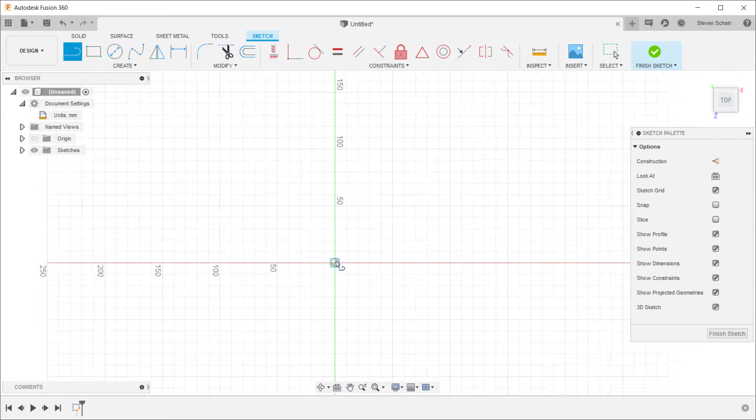You know, I'm always losing my keys or misplacing them. So I decided I was going to design a key holder that I can 3D print and put on my wall. I decided I would use Fusion, and here I'm going to go through the steps of creating this design of a very simple key holder that's flexible and allows me to replace the pieces that I have in the keys. So here I'm creating the base sketch. Once I have the base sketch created, I will add dimensions.

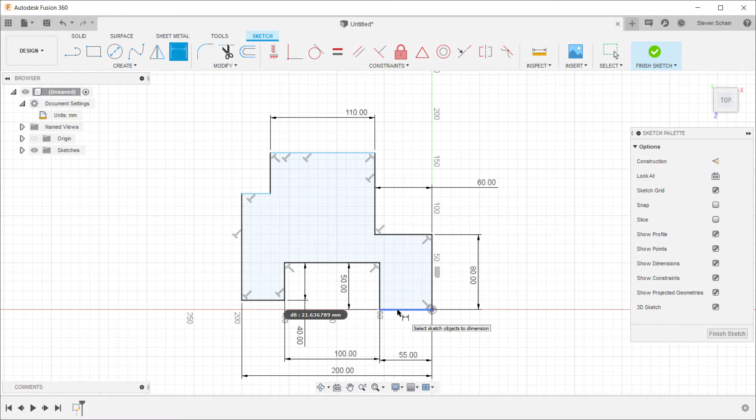Use an overall dimension here, and then I have one more dimension. And now we have our base sketch. We'll extrude that out. It's going to be 30 millimeters. A couple of fillets. Give it a little bit of a nicer look so it's not square and boxy.

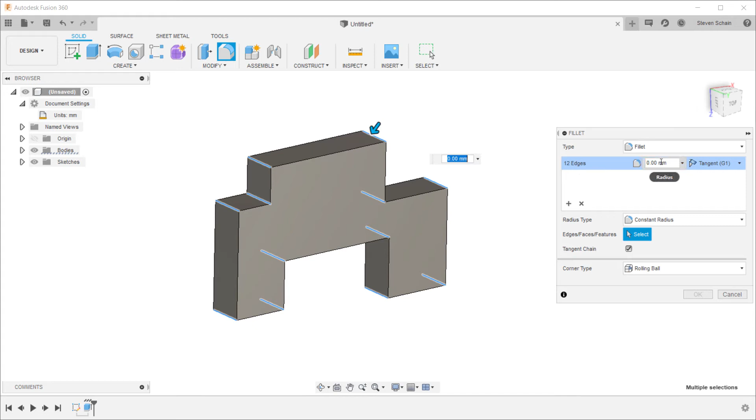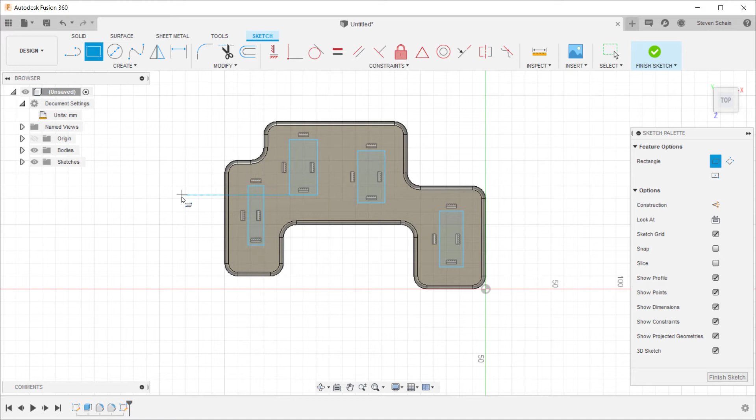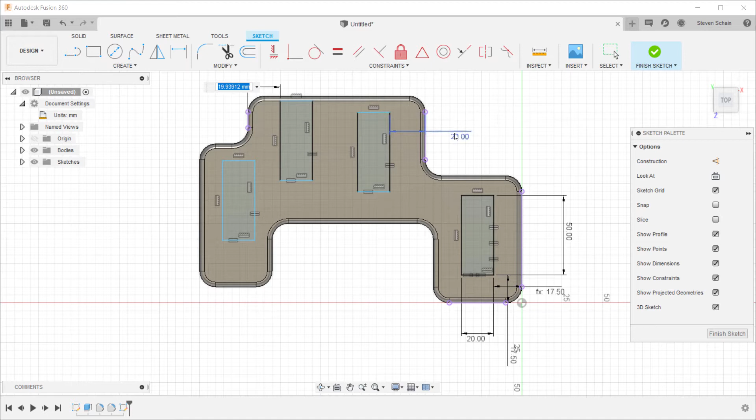And here I'll create 4 rectangles that will be used to cut out holes in this design. And I want to make these, they're going to be 20 by 50, and I want to make the rest of them the same. So the easiest way to do that is just pick the edges and use equal as a constraint. That will make sure that they're all equal in dimension, and then I will place these where they need to be placed. Adding dimensions where I need to add the dimensions. I don't need to add dimensions everywhere.

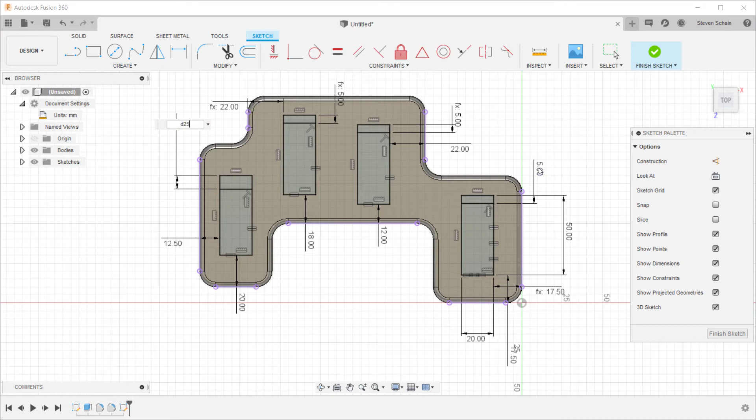And once I'm done with that, I'm going to add a line that goes across that's 5 millimeters down from the top. The reason I'm adding this is because I'm going to add a little lip into these cutouts that will make it like a holder. So we'll select all those, make those 10 millimeters deep, and then I'll go back and I'll turn on the other sketch that we just created, and I'll make the holder sections. Those are going to join with, I'll make those 5 millimeters deep.

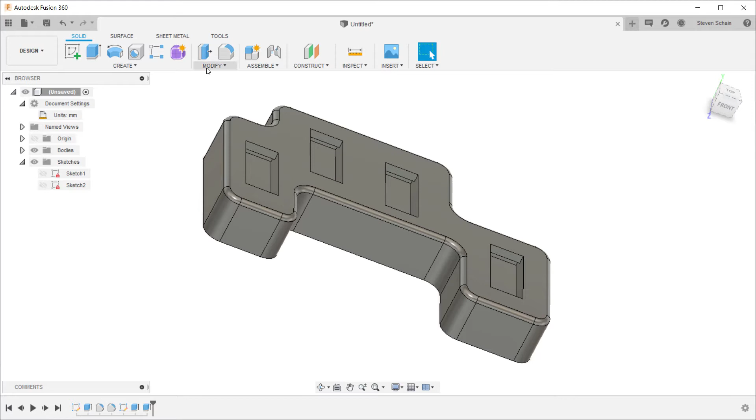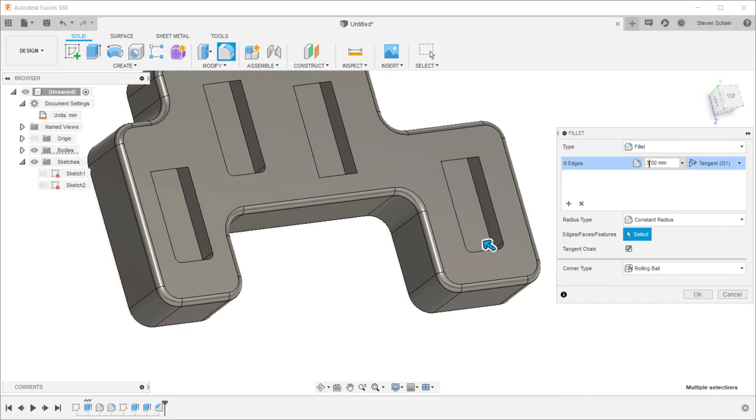Then we're going to take those and chamfer them 5 millimeters. That will give us this undercut, and the way those parts are going to be designed that are going to be the inserts, they're going to be able to shoehorn in and sort of hang from the top. So we'll add fillets to these parts here just to give it a little bit of a nicer look.

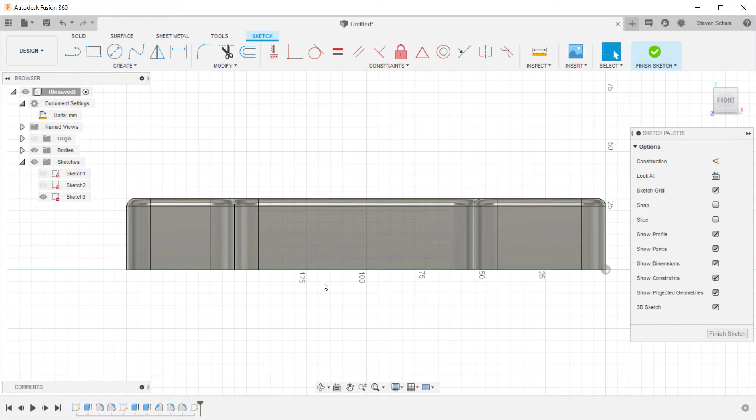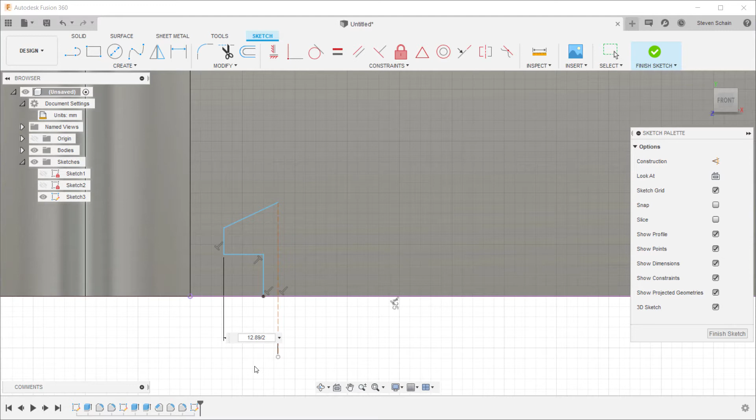One of the things I need to add is a way to mount it. So I thought of a bunch of different ways, and what I decided was I was just going to create these keyways based on the bottom line. I'm just going to create these keyways that allow me to put a screw in. Going to use a center line and then mirror the parts around the center line and make that about 6.45.

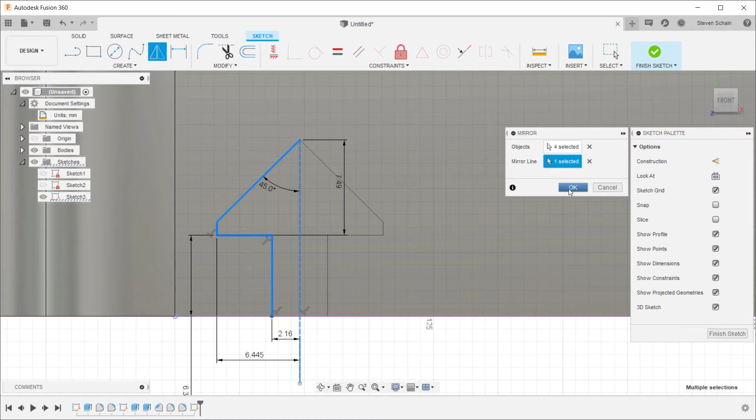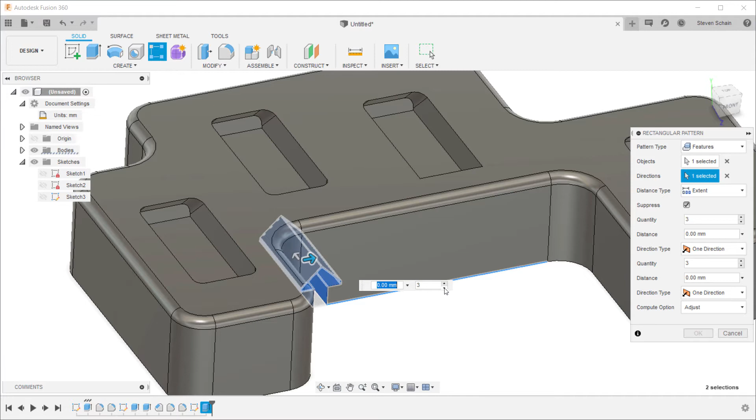So adding dimensions for the angle and now the distance and now the height. Once I have those, I can mirror these parts around that center line. Now I can dimension the center line to the edge. Once I extrude it, I'll make an array of that feature. Set that to 3.

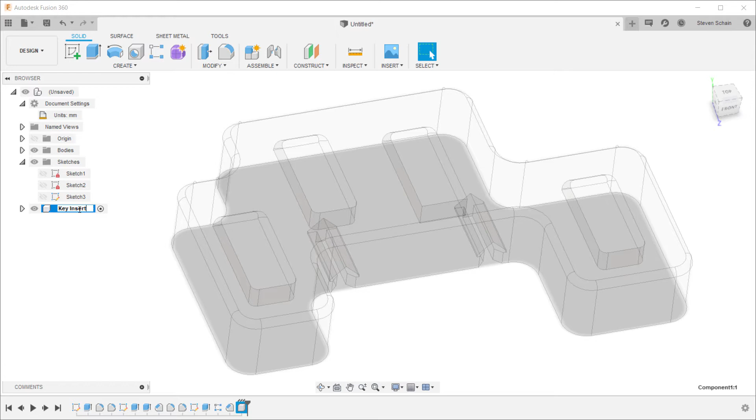Chamfer those. That'll just make it a little easier when I put this on the wall and slide it over the screws. And that's it. I'm going to create a new component for the key insert itself. Now, again, this is going to be modular, so the key insert itself will be a smaller part that'll be printed separately. And you'll see later on how I print these using a program called Simplify 3D.

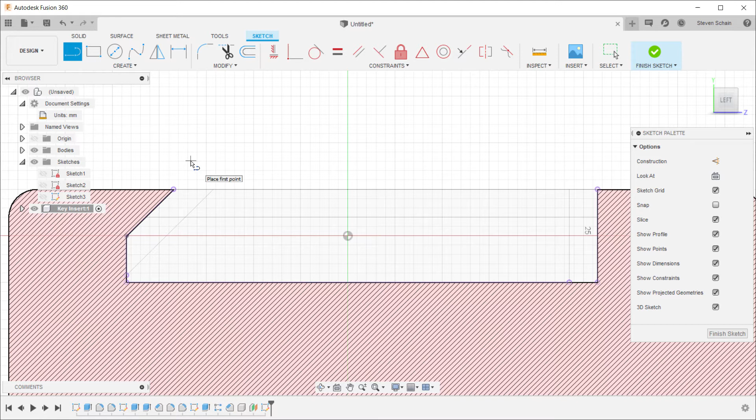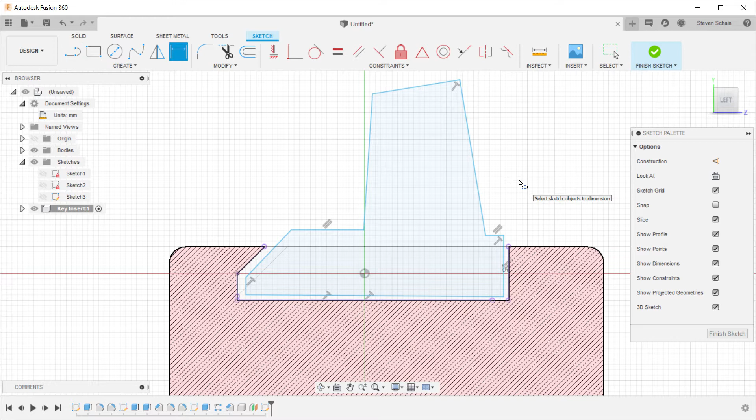Now I'm just going to project some of these edges, then I can use those edges as reference. Go ahead and draw my shape. And again, I'm not going to dimension this yet. The way I work is I just do things by eye. I add the dimensions afterwards. You can add the dimensions as you go, or you can add dimensions at a later time. I tend to create a simple sketch first and then add dimensions afterwards.

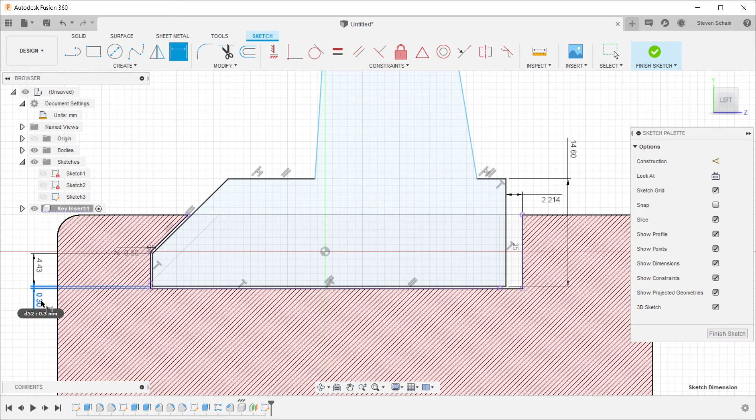I'll use constraints, dimensions, offsets, move things just as I need to. And set it up so that when I print this, so I'm doing a 0.3 millimeter offset from the edge. What this will allow me to do is when I am printing this, that 0.3 millimeters will give me enough of a gap so that this can fit nicely into the cutout for it.

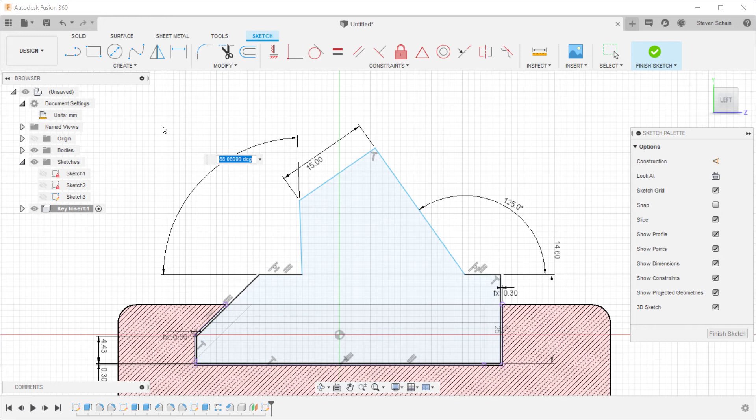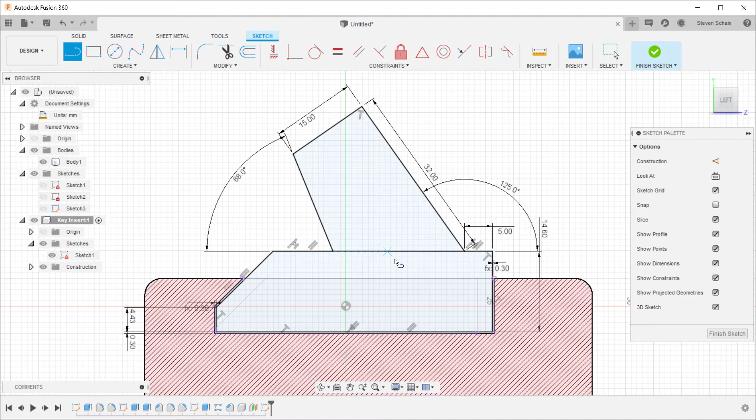So I'll add a few dimensions. Right, I want to have just 5 millimeters there. And that gives me the shape I need. One thing that I will add, because I'm going to use this sketch twice, once for the bottom and once for the angled key holder. Now extrude that out 19.2 millimeters from the center. Again, I'll do the same thing with the key holder. It's going to make that 10 millimeters.

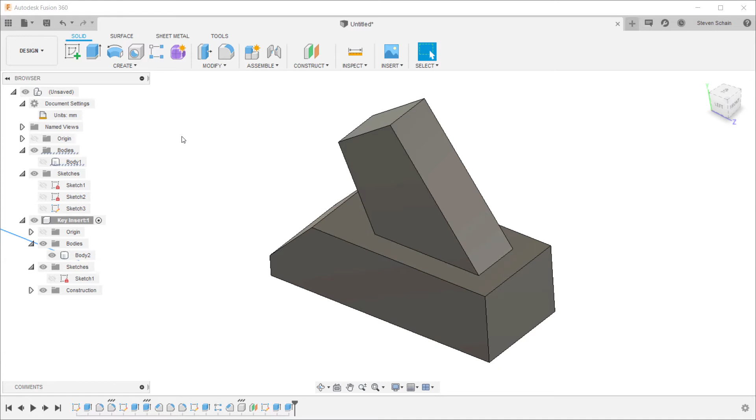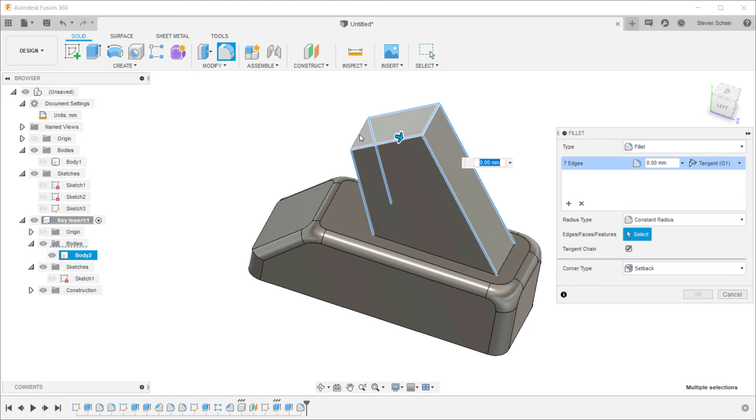And then I'll go ahead and add some fillets and just make it look a little cleaner. This will also help with fitting it in because I've filleted the original. And I'm going to use multiple fillets here because I like to use the setback. Visually, it's a little bit more appealing, and when it 3D prints slightly differently. So I'll go ahead and add some. That gives me the overall piece.

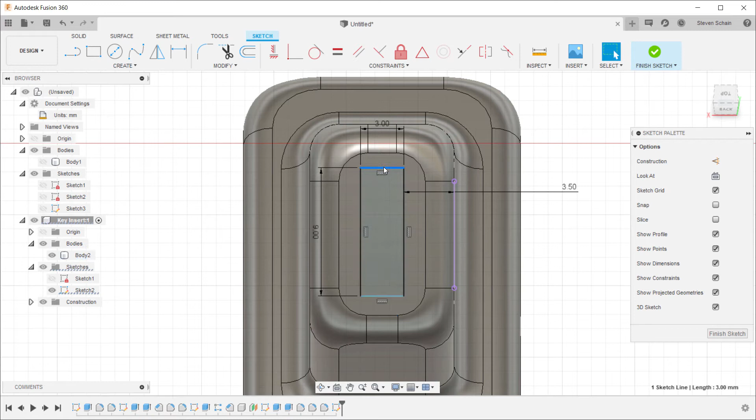Now I'll make the keyway. So what's going to happen is the key is going to slide into this. It's going to make it a little bit easier for me to just put a key in. It also acts as a hook. So the way I've designed this is not only is it a key holder, but it's also a hook, so I can put anything I want up there. And the way this has been designed is the keys fit nicely into the slot.

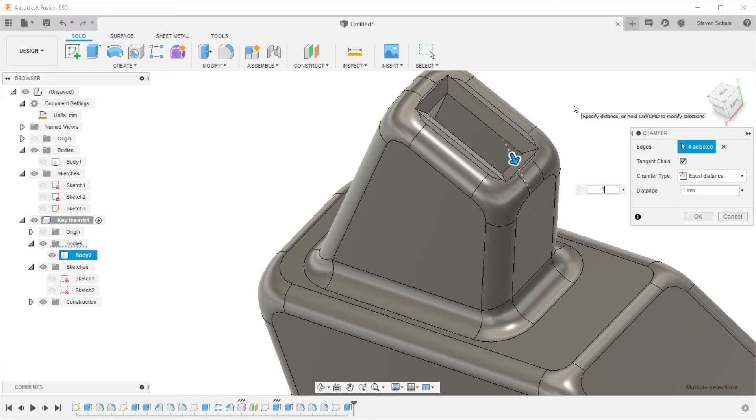So now I'll make the key slot and extrude that back and cut it. Let's go negative and cut that. And then I'll add a small chamfer on the edge, and it just makes it easier to get the key in. And that's the part. And that part will fit nicely into the slot that's in the base.

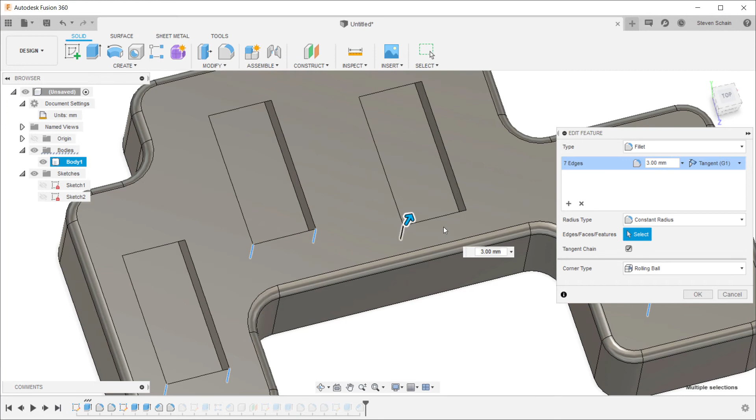Now I don't need to make 4 of the key holders because I only need 1. I'm going to 3D print 4 of them. And the nice thing about Fusion is I can go back and add these fillets that I missed at a later time. Now that I've saved it, I'm going to go over to the Tools menu, and I'm going to output this to an STL file.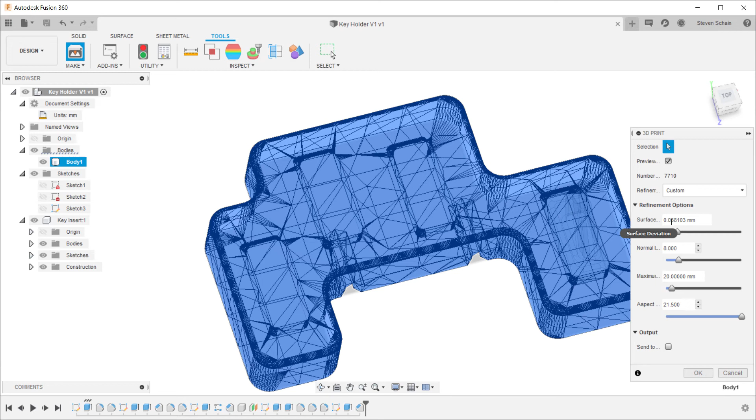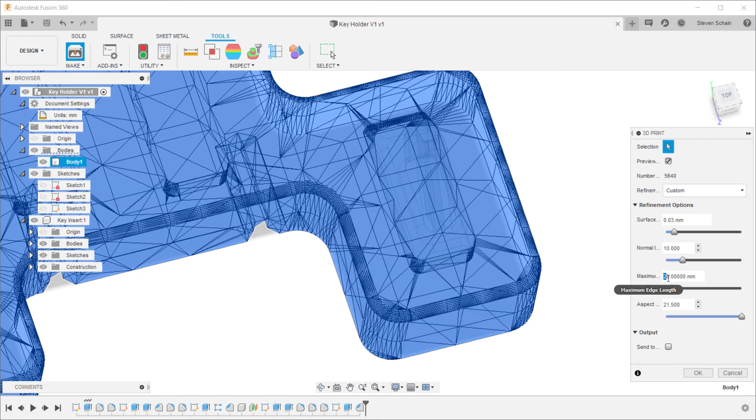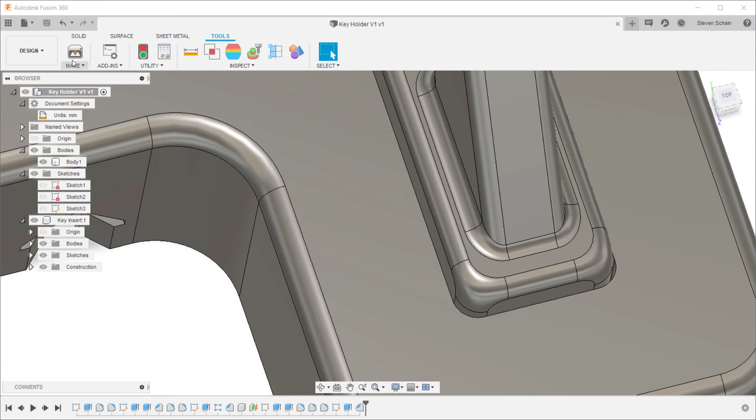You can use the refinement options to increase or decrease the quality of the final model. So options like surface deviation and normal deviation affect curved surfaces, whereas maximum edge length and aspect ratio tend to affect linear surfaces. So aspect determines the aspect ratio of any polygon. The smaller the value, the shorter the polygon; the higher the value, maximum of 21.5, will give you a longer polygon. We'll save this, and then we'll export the hook, and we'll make this a little bit higher quality than it is now. I'll overwrite that file, and now we'll move on to 3D printing.

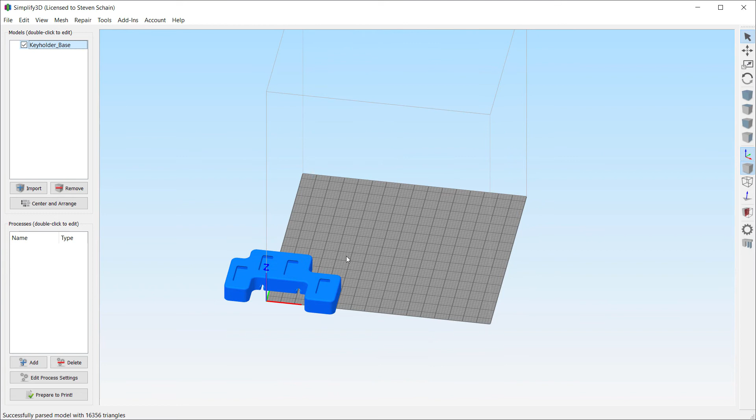Once the STL files are exported, we can use Simplify 3D to generate the G-code file we need for 3D printing. We'll import the base model, and we're going to be using my Folgertech FT5, which has a build area of 12 inches by 12 inches by 12 inches. It's a relatively good 3D printer. It was one that I built myself from a kit from Folgertech. And I've made some modifications to it, so it prints really nicely.

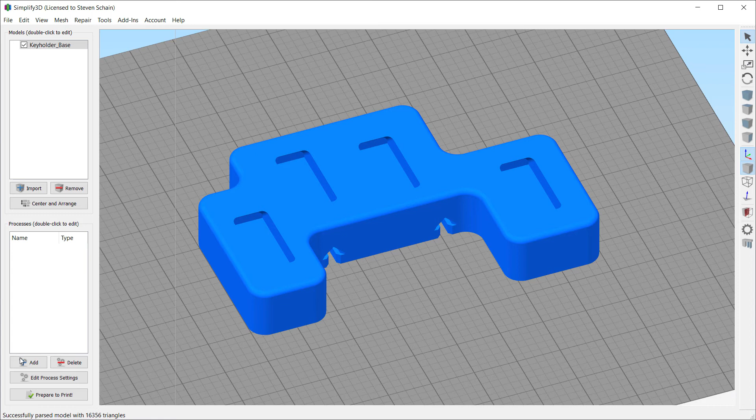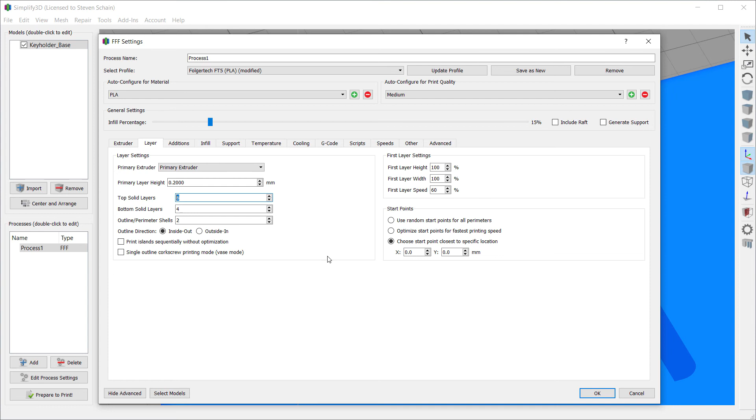Here we'll go ahead and add a process. So Simplify 3D uses processes. So we'll add the process, set up our perimeters. So in this case, we're going to use 2 perimeters. And I'll go ahead and change the infill. We don't need as much infill in this. We'll use 15%. And I will add 1 more top layer. When you reduce the infill, there's a potential for the top layers to sort of sag in between when you use a low density infill. But the low density infill will help with print time and the amount of material, and having the additional top layers will help ensure that I have a nice smooth top surface.

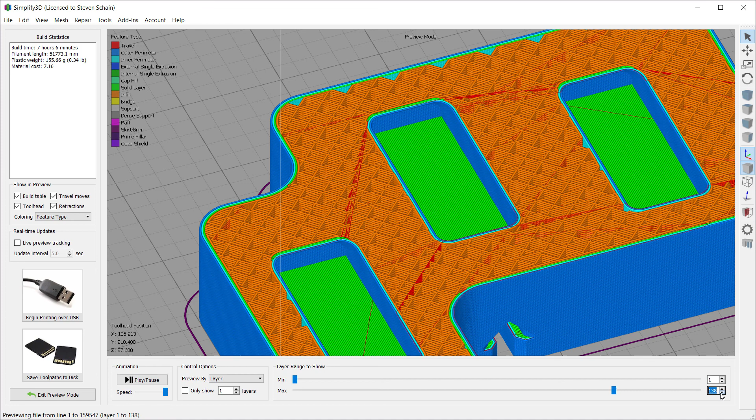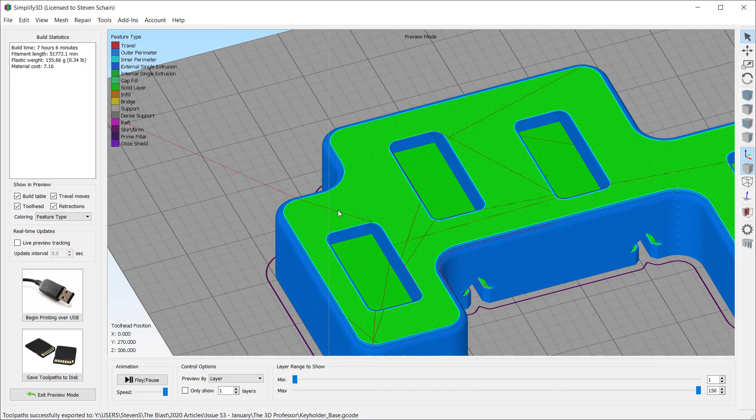We'll go ahead and prepare that, and you'll see that this is the sliced version. I can scrub through the layers, and you've got 6 top layers, and then we go into the infill, and you can see it's fairly loose infill. 15% saves on material, and it also saves on time. We'll go ahead and export this as the keyholder base G-code file, and once that's exported, I can send it to the printer. So enjoy this time lapse of the printing.

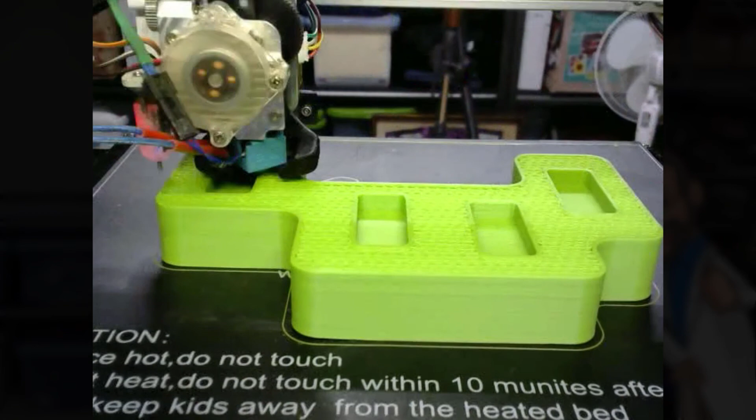So we've finished the key holder, 3D printed it, and the next step is to finish it and put it up on the wall. Check back for another episode where we finish the key holder, hang it, and start using it.